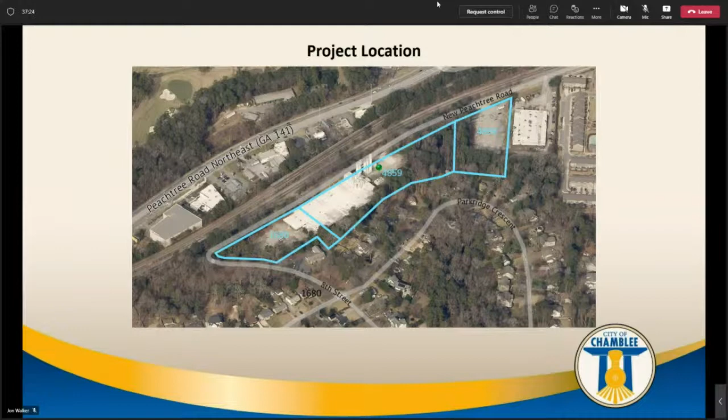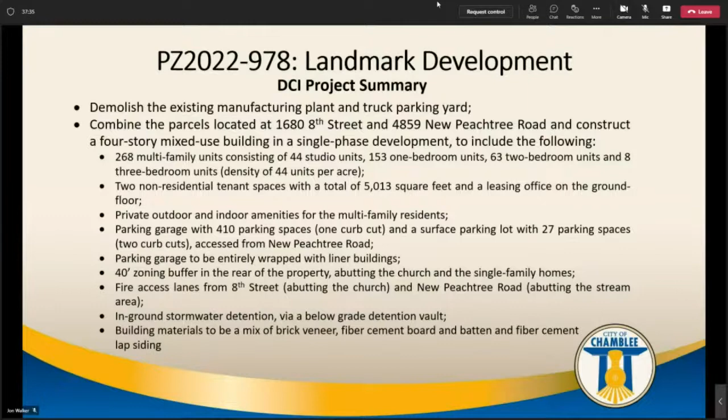This is a site location where you can see it is a long and narrow set of parcels. The proposal has several components to it as indicated. I just provided the highlights of what they're proposing, including the set of variances and waivers that they include concerning things like the parking, also the request to vary from the requirement to build steel structures for multi-family. Also, there's a request to not have non-residential as the first floor of a multi-family project.

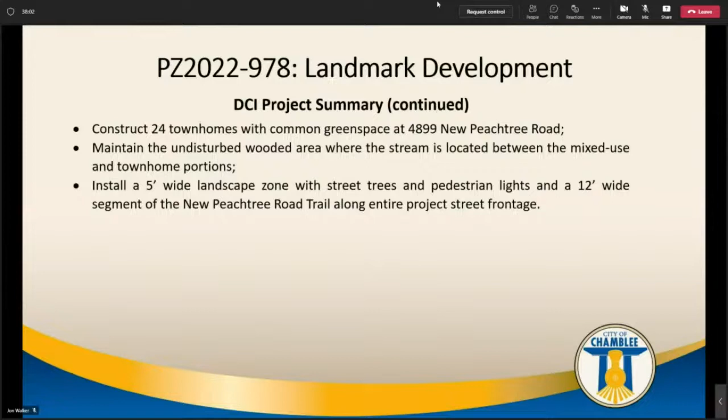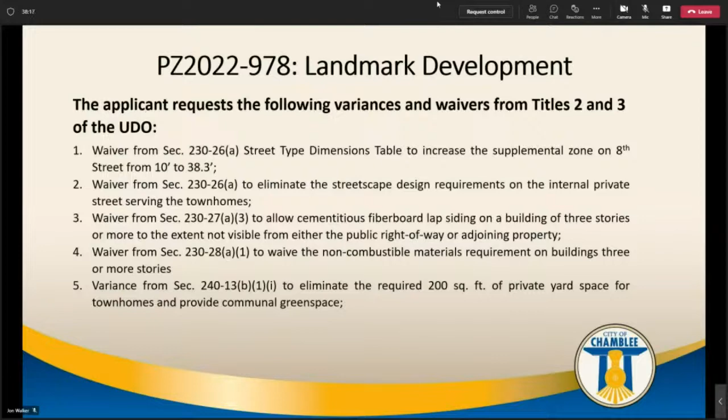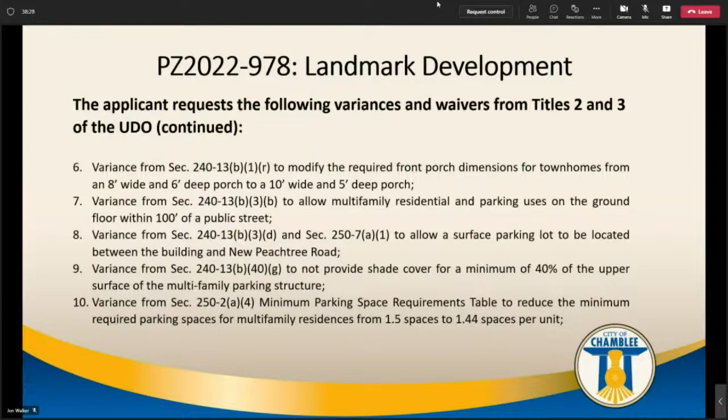The project has, like I was saying, several waivers that are included. I won't read every one of them. There's a total of 15 now. I did highlight that one of the changes was to move out of the stream buffer, but there still remain variances sought for parking and the configuration of the multi-family structure.

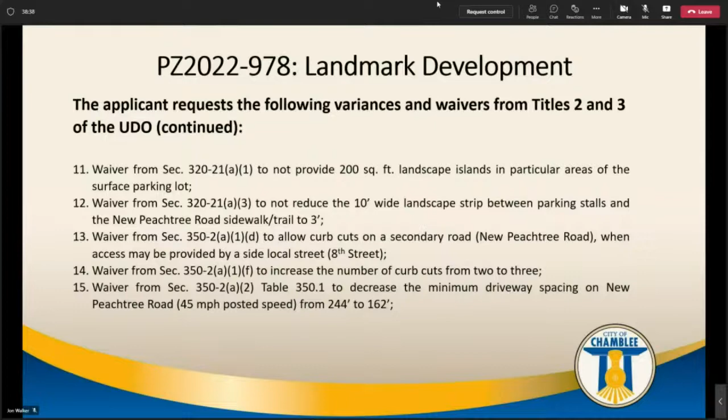There is also some requests as it relates to the access and the distance between access and drive aisles. The property is divided essentially into two components, where on the right-hand side on the screen is where there's the proposed townhome segment. It's divided with a stream between the two proposed areas of buildable area.

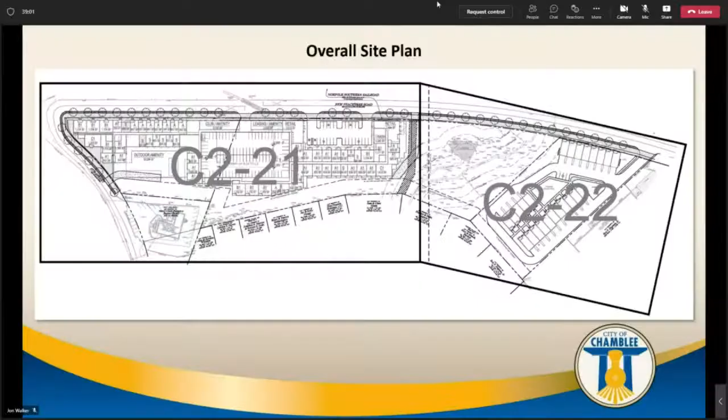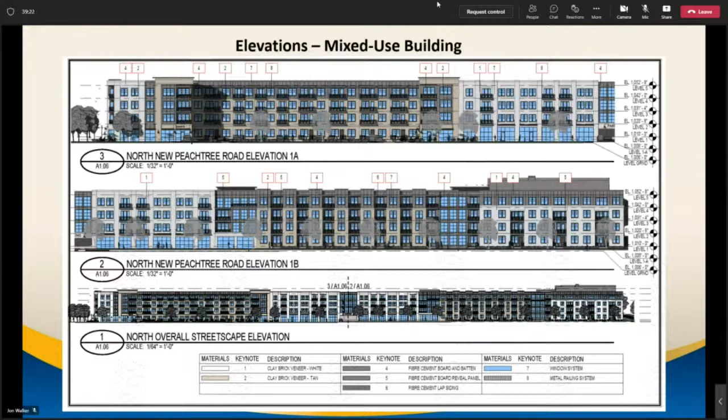I'm going to let the applicant walk through more detail of the proposed project and the specific features of it, just highlighting some of the elevations that were included in the application and the proposal to have everything pushed to the street front and comply with the streetscape requirements as well as the trail component.

I think this is a helpful viewpoint to understand the interface with the streetscape. Normally we wouldn't allow parking in front, between the building and the street, as proposed here. In this case it does break up the street frontage, but that was one of the variances. Staff is recommending denial also of the variances since they are site specific, and we are not finding grounds to recommend approval for the zoning at all.

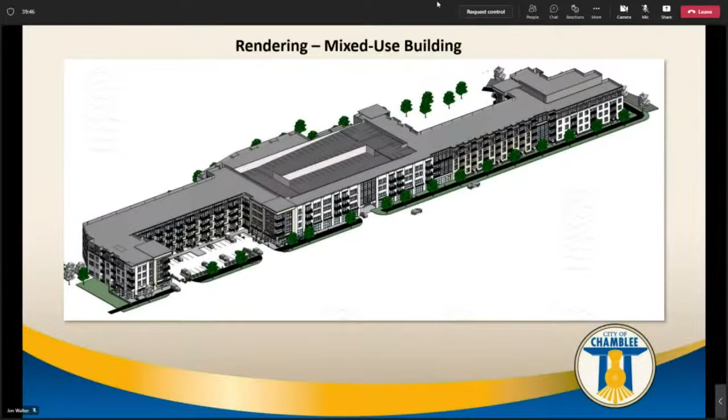Here are illustrations of the proposed layout. They do wrap the parking deck. There's a parking deck proposed to meet the needs of this high density number of units. I'm going to skip through since I think the applicant's going to want to walk through some of the detail of the features of the project.

The density and height would not be appropriate. Medium density would be up to 19 units per acre, so it would still be substantial and could be a viable use for this property instead of the high density, which is what the applicant's requesting. So with that, I conclude the staff's report.

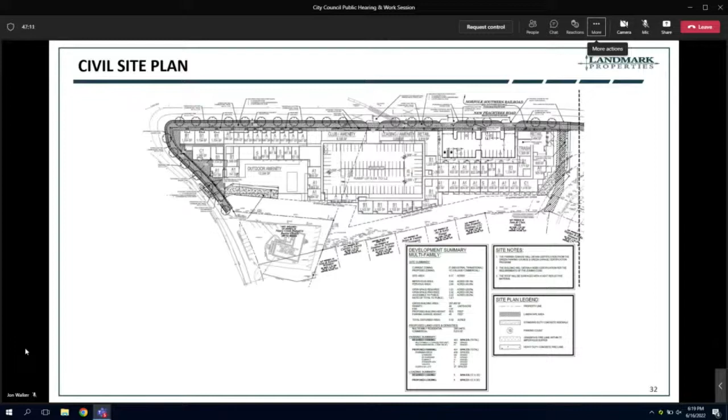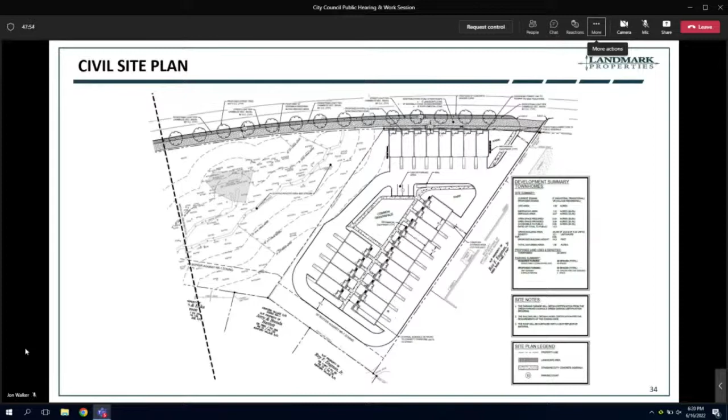The current zoning is IT, which allows 60 feet of height and about 350,000 square feet of development on the property today. It allows schools, shopping centers, offices, auto repair, and hospitals. This property is in the New Peachtree Road character area, which recommends the zoning districts we're asking for, both BR and BC. Neither of these are consistent with the current land use plan, MDR, which recommends other zoning districts.

The staff has relied on the proximity of the property to single family to recommend denial, but they recommend denial of the townhome project 2 lots down for the alternative reason. Staff speaks to the residential density not being compatible with the neighbors, but this proposed density is actually less than the square footage that would be allowed under the current zoning today.

The height is appropriate. Again, it's 10 feet lower than what is allowed today. And as staff noted in the staff report, there are several challenges with this site due to the length, topography. It is an existing Georgia brownfield site, so redevelopment of it does create additional challenges.

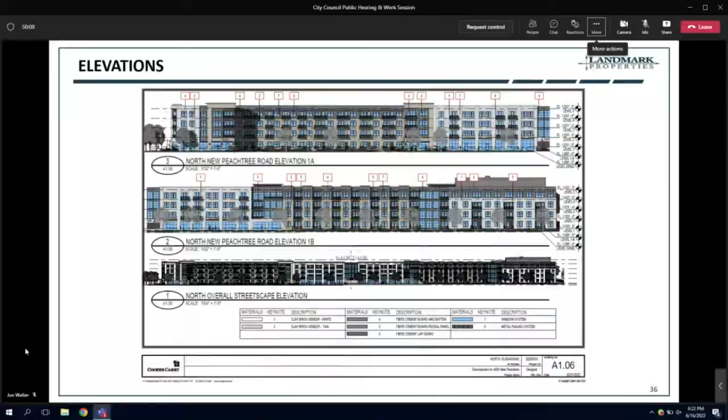Good afternoon, I'm Ronnie Mayer, community leader in Brookhaven, Ashford Park. The whole idea here sounds pretty good, but one thing is this is the only apartment complex you're going to have in the neighborhood. I've got the stats of all the criminal activities in the year.

This is not even all your apartments on Peachtree Industrial. Over 800 in 1 year. 800. We really don't want that in Ashford Park or that section of Chamblee.

What we'd like to do, you got 3 of the top real estate agents sitting here in this room right here. The townhomes will work. We'd like to have $1 million flats, ownership, not apartments. It's nothing to do with who lives there or what. $1 million flats, the taxes are higher, and you have ownership. You're not going to have everybody hot rodding down the road.

And we got a real problem with traffic from this, it's going to come into Ashford Park, down Caldwell Road into Reading, and there's kids everywhere. And if you have rental units there, they're going to be blasting down the road, and there's nobody to slap each other's hand. If it's ownership, everybody's going to know who lives next door. It's not going to be all the transit people.

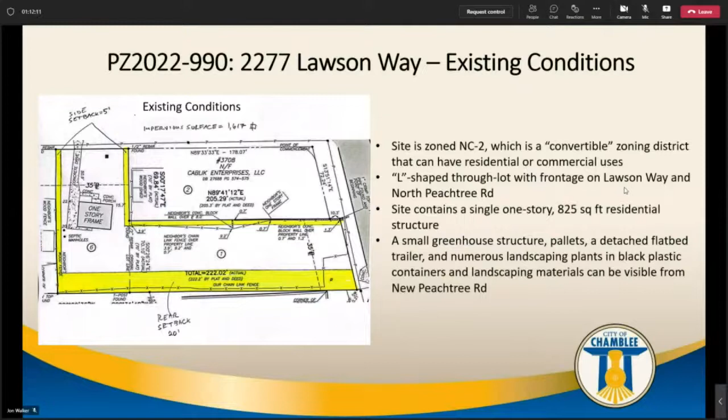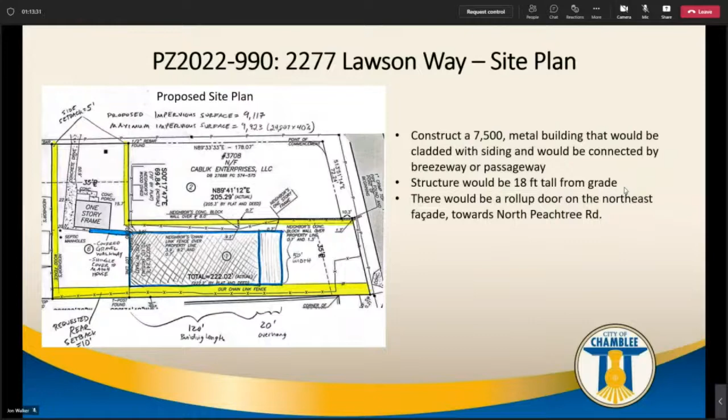That is the basic definition, and the rule regarding rear setbacks is what's being applied here, and the reason for the variance. There may be some confusion about that definition, so I wanted to spell that out. Let me back up. The structure is proposed to be 18 feet tall from grade, so it's a large structure, and the request was encroaching into the rear yard setback. Staff found no hardship or other cause. Although it's an unusually shaped lot, that doesn't impact their options to redesign it so it can comply with the rear yard setback. So staff is recommending denial.

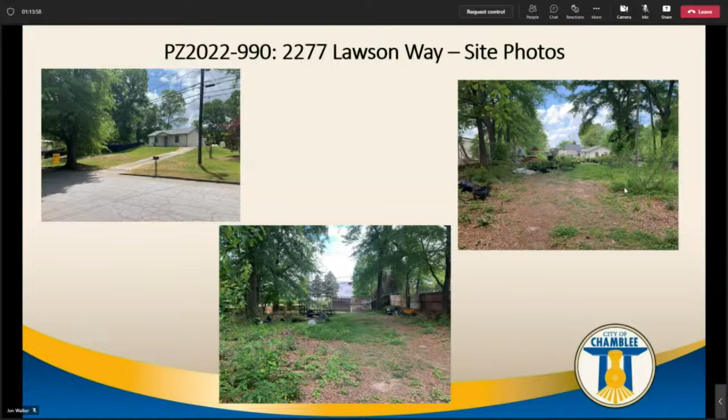Mayor, City Council, thank you. This is my first time doing something like this, so I apologize if I don't do it right. My name is Ian Mendelson. I currently live in Midtown, but I own a house on Admiral Drive, 3668 Admiral Drive.

It's currently being rented, but I'm going to try to move back there because of this project. My parents are moving to town from Charlotte, relocating to be closer to me and my kids. So I'm going to move to Admiral, and my parents are going to live on Lawson. My dad has a lot of tools and a motor home and other stuff he's collected over the years, and he wants to move here from Charlotte, so this is the main reason why I'm doing this.

The variance request is to reduce the rear setback from 20 feet to 10 feet, although I respectfully disagree with the city's interpretation of what the rear lot line is. They're stating the rear lot line is this bottom line here. I don't know if the laser pointer will work.

It won't. So the rear lot line—this is a through lot, not a typical lot. It has been this way, unimproved. This other portion facing North Peachtree, as far as we can tell, has never had a building on it. It's been in this exact configuration with the barbed wire fence since the late 70s, early 80s. It has a one-story, 825 square foot home on it.

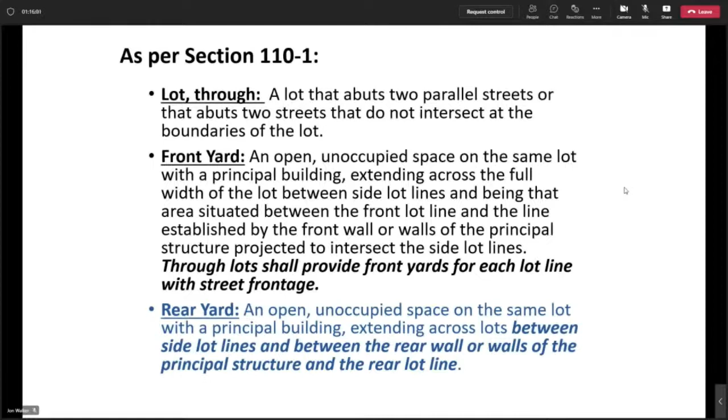A through lot is a lot that abuts two streets. It doesn't have to be front and back, it can also be on the side. By definition, a through lot has two front yards essentially, one on each street. As such, there is no rear lot line for this, so there's no 20-foot rear lot line setback. A rear lot line has to be between side lot lines.

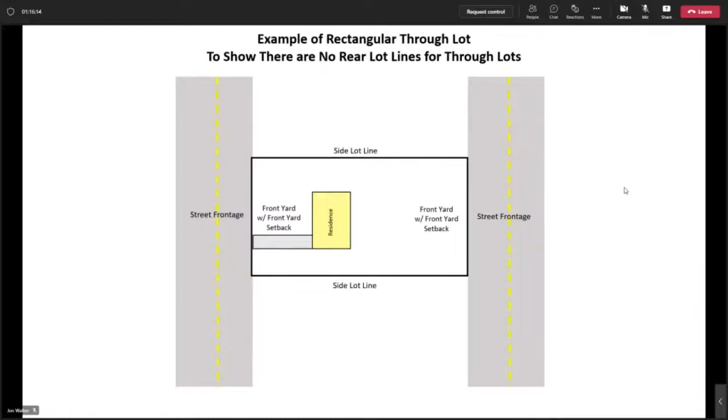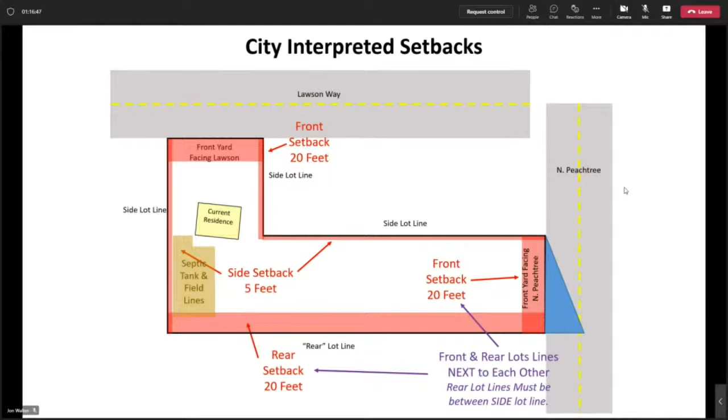They're trying to say that there's a front setback of 20 feet, and then there's a rear setback of 20 feet. You can't really have a front setback and a rear setback right next to each other, it just doesn't work that way. So I think their interpretation of it is incorrect. It's a through lot, and as a through lot, I have two side setbacks and two front yards, so I really should not need this variance, but they stated that I did because of their interpretation.

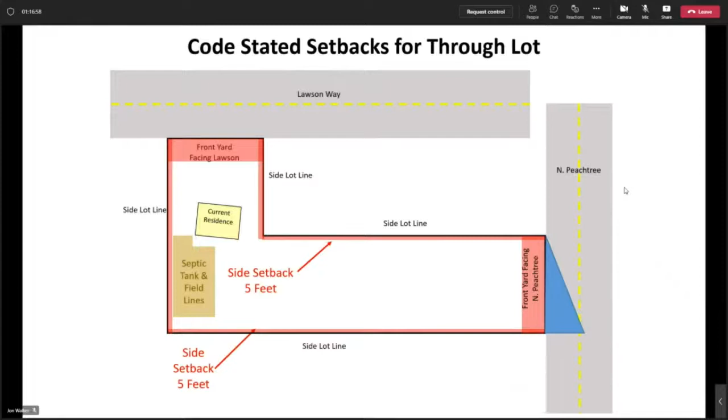What I'm requesting is a 10-foot setback. If indeed I do need a variance, I'm recommending that it be 10 feet. I'm proposing a big workshop here. Yes, it's big, but it all falls within the floor area ratio. In fact, I could build this right now with the 20-foot setback, but it would be a lot closer to the other lot line. I'll go to that in a minute.

This is what I could build right now if I have to abide by the 20-foot setback. It just won't be centered. It won't look as good.

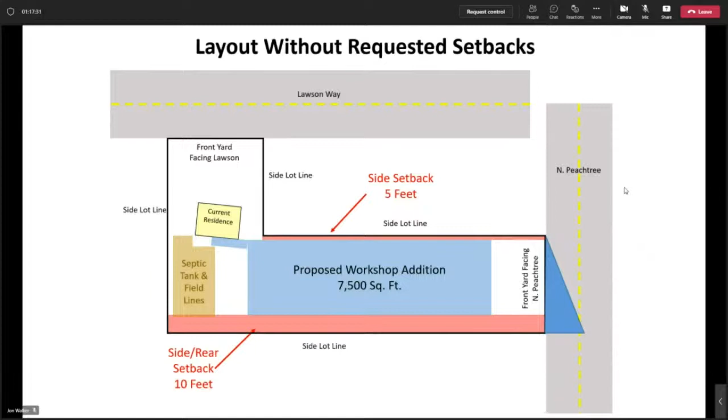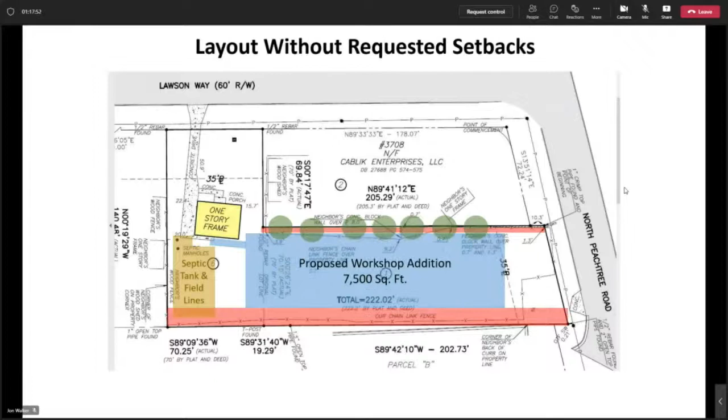On top of that, this is the proposed lot line back on the proposed building on the survey. There's trees, there's a wall, there's a barbed wire fence. All that stuff I'd have to remove, and most likely have to build so close to the trees that I'd have to have them removed if I move it over. So the trees here, that wall, and the fence would all have to come out. And on top of that, if I have to build closer to that, without the variance, the gate, which is already there, which has an entrance from North Peachtree,

it wouldn't be centered on the building. It would just look weird, it would just look offset. I'm trying to make it as aesthetically pleasing as humanly possible.

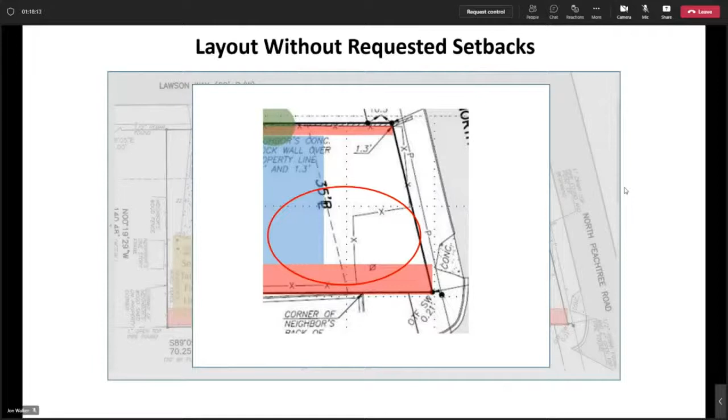There's another portion I wanted to go over real fast. Going back to the original survey, this is obviously two old lots that were combined at one point in time. The lot that faces North Peachtree Street, the reason why you never had a building on it that we could ever tell is, according to DeKalb County, you can't put anything on that piece of land. The sewer is over 200 feet away, so I can't connect to sewer.

As per the state of Georgia law, it requires at least 25,500 square feet of continuous area, or 0.6 acres, to put in a septic field. So you can't put in septic, you can't put in sewer. So it's just going to sit there unused unless I can build onto the back of the house.

And the reason why it's offset is because I already have the existing septic tank and field lines. They were grandfathered in, and they were replaced when we rehabbed the house. DeKalb County approved its replacement. They would not have approved putting in a septic system if nothing was there before, but it was there, so they allowed us to do this. So unless I build that way, there's absolutely nothing that can be done with that land as it sits.

What I'm looking to put in is large, but it's reasonable. It all falls below the floor area ratio that I'm allowed to build under the NC2. I'd like to save the rest of my time for any rebuttal in a minute.

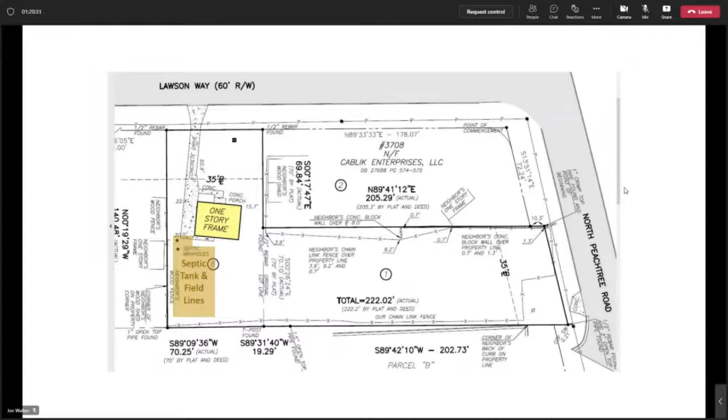Wait, there is one thing. What's it going to look like? I just had to go find some mock-up. It's not going to have a metal building or metal cladding. It's going to have HardiePlank siding on the side, with just a covered porch on that one side with some roll-up doors. It's not going to look anything like that. That's the only thing I could find online that would let me put a building together to show what it would sort of kind of look like.

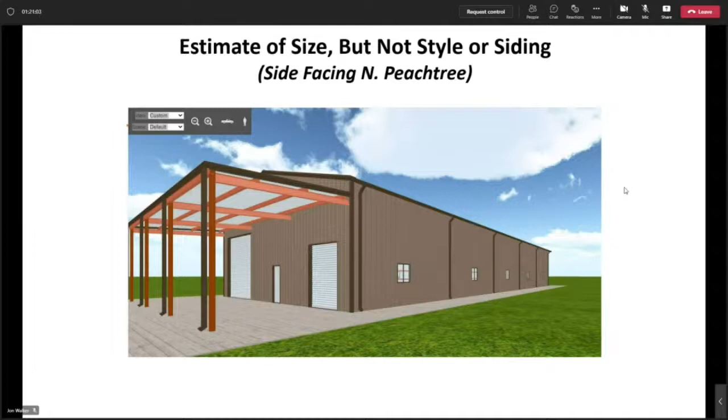Thank you, sir. Again, this item will come up again later in the agenda, so there may be questions.

Next item up on the agenda is 3499, PC 2022-1009, Chamblee Plaza sign variance. Michelle?

Thank you. The subject property is located at 5544 Peachtree Boulevard. Staff found no grounds to recommend approval for this application. The request is to allow an electronic changeable copy sign to be installed on an existing non-conforming pole sign. It's also requesting a variance to change the display times. The code requires display times to change only every 30 seconds, and they're requesting to reduce that down to 6 seconds.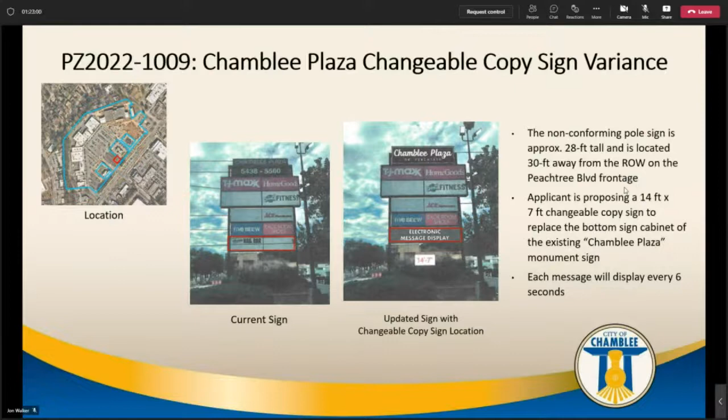I'm just comparing it to the existing sign that's there. There are just additional images of it, so you can see it in perspective. This is actually the applicant's portion of their presentation to make their case, so I apologize.

That concludes the staff report. There is no hardship, there are no other grounds that meet the criteria for recommending approval. Therefore, staff recommends denial. Thank you, Michelle. Anyone here wishing to speak in favor of this item?

Come on up and tell us your name and address, please. Dentrigio, Trinity Development, 1915 Airport Road, Suite 2D, Chamblee, Georgia.

I am, I guess, the applicant. Nice to see everybody. So, yes, it is a non-conforming sign. It's 28 feet tall by 14 feet, is that correct? 28 by 14. What we're proposing is a small panel, which, if we go to slide number 3 - yes, if you don't mind. Thanks. You'll see it says electronic message board, that's 2 feet by 2 feet 7 inches by 14.7.

It's a small panel. It will be changeable. It will display logos only. So we've got approximately 24 or 25 tenants at Chamblee Plaza. We're getting very close to getting Publix open. A number of tenants have come to us with this request, saying, hey, is there anything you can do to give us some visibility? We only have, as you can see, 8 signs available. With this one, it would allow the other 16 to have availability on the sign.